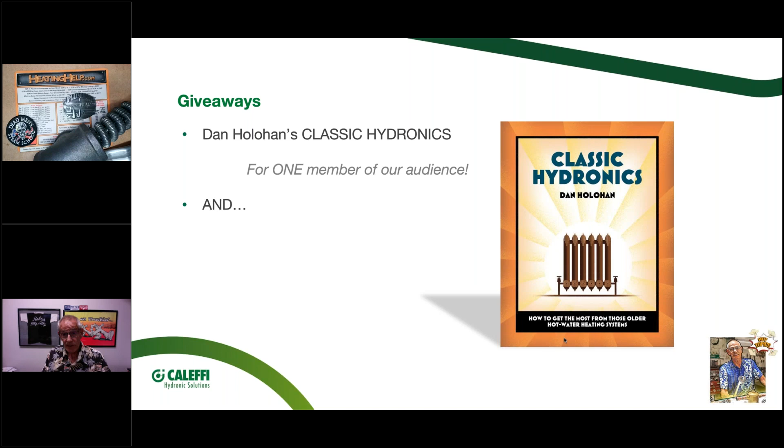All right, so heat exchangers. Those of you who've been in the business, whatever part of the business you're in, installing or selling or manufacturing, there's a lot of different types of heat exchangers out there. I mean, just look around you. If you're in your car, if you're in your home, there's heat exchangers all around of all different types. I'm going to try and just focus on ones that relate to the hydronic industry. We won't get into air coils or anything like that. And there's plenty to talk about there. Manufactured ones as well as homemade ones.

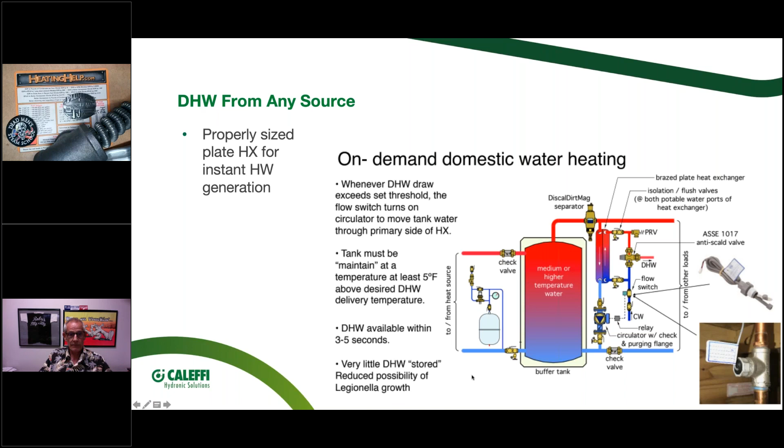And these will kick on quickly. The ones that I built at my own place, within 5 seconds of opening a faucet, of course depending on the piping length, the hot water was coming out of these. Just super performance, very high efficiency out of these flat plate heat exchangers because of the surface area. You see, it's just got a lot of place in there to do that exchange. So those are some of the pros on the side of the flat plate heat exchanger.

And these are called satellite units. We make them for heating. We make them for domestic water. We've got combination modules that do both domestic hot water and heating. Some of them will have BTU meters on them so that you can bill the tenant based on the amount of hot water, the amount of heat that they actually use. In fact, we've got one that has the ability to meter the cold water that goes into the building, meters the hot water because that's coming off the district system, and it also meters the heating water.

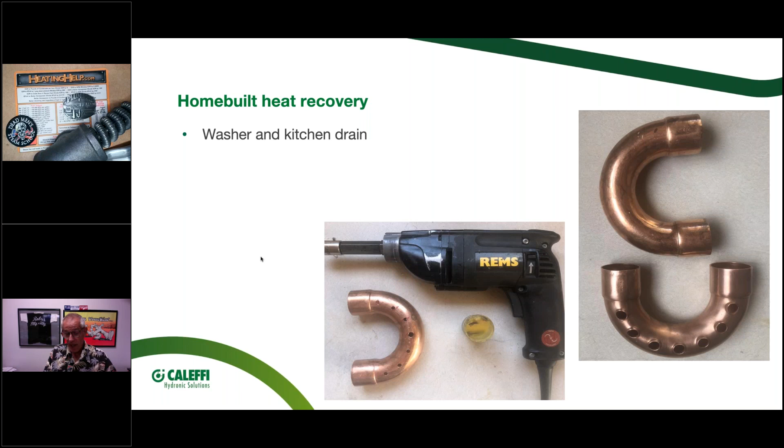And this 1.25" fits exactly just perfectly around a piece of 2.5" copper pipe. So I had a good snug connection there, and then you'll see as we go here, I found a way to put the tubes against the side of the copper tube. So I've got it installed. I've got a little bit more work to do. I'm going to put some clamps on this to get those nice and tight against the copper tube. And then I'm going to put a BTU meter on here, and I'm going to run this and see.

So I've got my wash machine drain going in here and my kitchen drain. I couldn't get to a shower drain, but I'm thinking, well, I'll just try those. And by the way, 2.5" copper matches up pretty closely to a 2" ABS or PVC as far as the OD, so it clamps in there nice and tight. So I'll report back when I get a little bit of data on my little homemade heat exchanger. It's about 6 feet tall there. I had the pipe here, so it didn't cost me a lot to put this together. A little bit of welding gas to braze those in there and stuff like that. So I'll let you know how it goes.

So a couple things before I get in this heat meter that I want to talk about: when it comes to selecting what type of heat exchangers, there's pros and cons of the different types. In fact, let me go back a few slides. I wanted to touch on this a little bit more. I have my little cheat sheet here, and I forgot to go back to, oops, sorry. On the two different types, being the tube and shell, or the shell and tube, some people call them, and the flat plate.

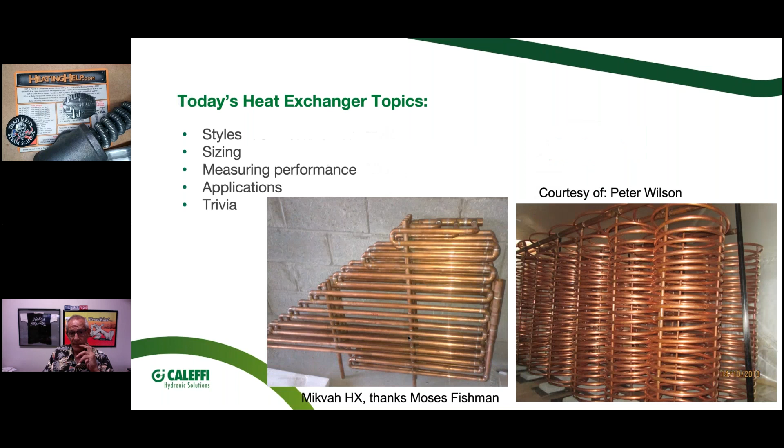Really what it comes down to, you'll find the flat plate is probably one of the most efficient, just because there's a lot of surface area. And they've really engineered these over the years. They've gotten to the point where they can actually change the size and the shape of the little chevron. If you've ever cut one of these open, you've seen these plates, they can change the size and the shape of that to really optimize the performance, the thickness of the plates in there, the number of plates. So that, of all the ones that I've looked at, claims to be the most efficient.

Now, the downside to that is it's really just good for clean liquids. You wouldn't want to put fibrous material, like the paper and pulp industry uses heat exchangers. That wouldn't work so good through that. You wouldn't want to put paint or heavy oils or something like that. So they're best for clean water. Some brackish water can go through there. Sometimes you'll see salt water going through them, but they don't work well when you have a high viscosity fluid or something that's got chunks in it. Waste sewage water, for example, can be used for heat exchange too, and that wouldn't work so well for a plate heat exchanger.

One of the questions that came in: can you oversize a plate type of heat exchanger? And I didn't know the answer, so I went and I found some good information on Alfa Laval's site today. And they said, in fact, you can't, because the key to a flat plate heat exchanger is you want turbulent conditions in there, because when you have turbulent conditions, that's where you're going to get the best contact with all those shapes in there. That's where you're going to have the best heat exchange.

And the key to a plate type of heat exchanger is you've got two moving flows. You've got a pump flow. You can't just gravity feed through a flat plate heat exchanger. So you've got a pump flow on both sides, so you've got good turbulent conditions on both sides of the plates in there. So the key to that is having them pumped and sized properly. And if you oversize it, what they say can happen is you can foul up those plates. So let's think of a domestic water application where you've got really hard water.

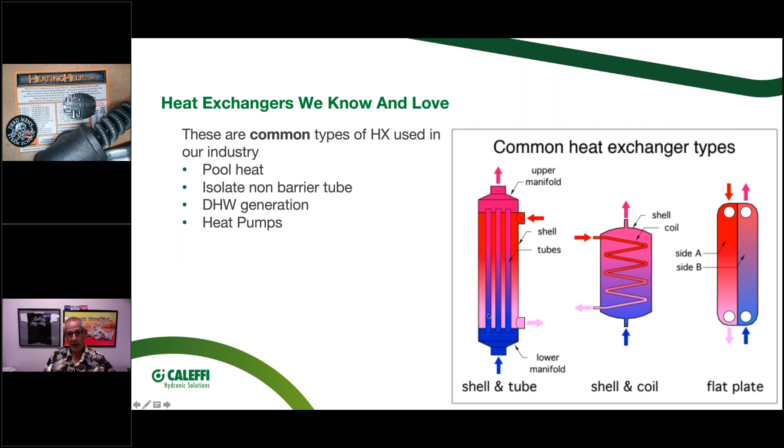If you oversize it and say, well, the price was right, I got 3 times the size that I needed based on the software program, but in fact, you could be going the wrong direction. So just be aware of that. There are some areas that you could get in a little bit of performance. So if you are going to start going with paints or heavy fluids or something like that, this type of heat exchanger is going to be better. They both were developed, from the research I did today, in the early 1900s. I think the power plant industry is where those came from. So that was one of the questions that came in about oversizing.

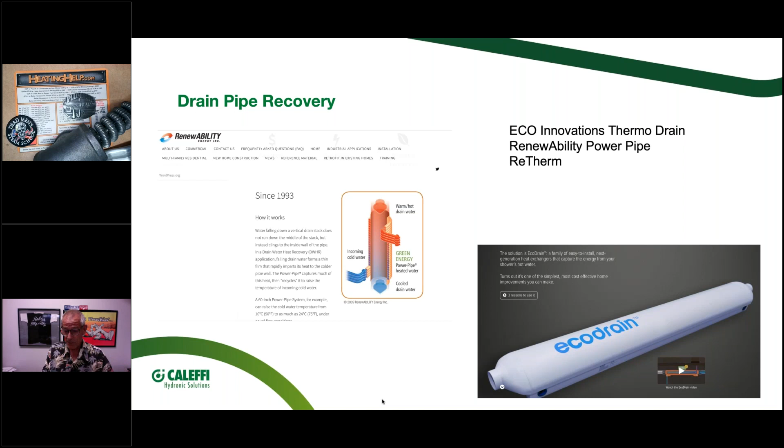Yeah, so what it's going to come down to is you start going with higher flow rates, it's going to cost you more pumping power. So that has to come in. Now, certainly for these little residential applications, that's probably not going to be a deal breaker. You're not going to get out of the typical little wet rotor size pump. But if you're doing a large application, I'll show you one that I visited here a while ago, that can make a huge difference if you're starting to run 20, 30 horsepower pumps to run all this. You want to pay attention to that.

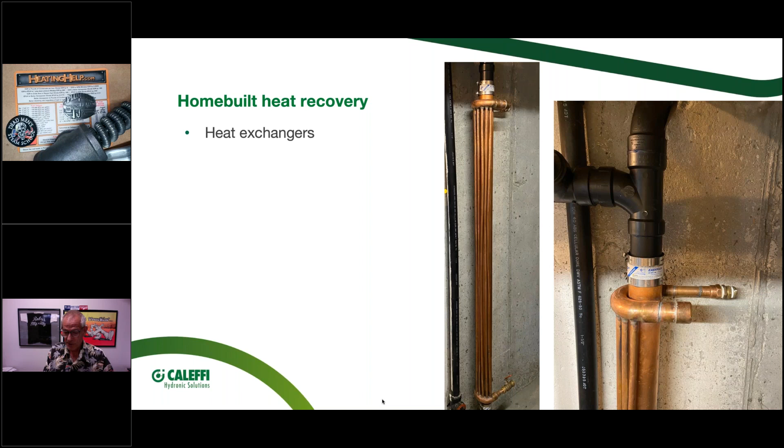If I know the flow rate going through there, and I've got 2 temperature sensors measuring my delta T across it, really that's the information I need to come up with a BTU performance or output on that. So that's really the best way to know exactly what's happening.

So we offer that BTU meter if you've got an application for that. We're starting to see more and more people doing district systems again. There's some projects up in Canada right now that are doing district systems. That's a good place for a BTU meter if you want to start billing your customers, your clients, your tenants, whatever, for the actual energy they use. And as we start to get in these net zero homes and stuff like that, we're seeing BTU meters are having a part to play in that here.

I'm going to let Max talk a little bit about this. So this is a system in DC.

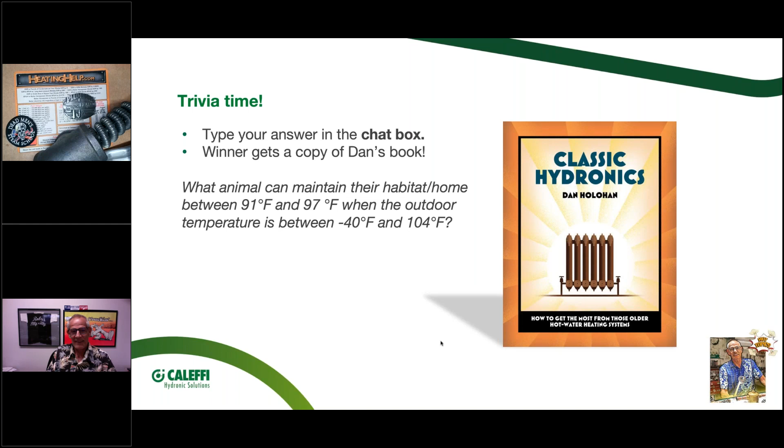So bear, chicken, honeybees, frog, mouse, beaver, brown bear, bee, woodchuck, and human. So what's the correct answer? It's the bees. So Colin Wonder was answer number 3, and it was correct for honeybees. Attaboy, Colin. Maybe he's a beekeeper.

But so this is another first for me. This summer, Max and I decided to get some livestock, and with the size property we have, we couldn't put a lot of big livestock on. So I don't know if bees are really considered to be livestock, but we bought some bees. Somebody gave us these boxes, and we went and bought a colony of bees, and that's my beehive in the backyard there. And you can see when it gets really hot at the end of the day, I even put a shade over it for them.

They beard up is what they call this, where they get out there and they actually flap their wings, and they're trying to maintain the temperature inside that box by just flapping their wings. And they can sense that kind of temperature gradient and keep it exactly where it needs to be. So that was a pretty amazing heat exchange feat, I would say, when it's over 110 degrees here in a couple of days, that they're maintaining that hive temperature. And certainly this winter, when it gets down below 0 here, same thing.

The honey that they've stored over the winter time is their fuel source. You got to have a fuel source to be able to do that heat exchange, just like the human body. I mean, we eat food, and as a result of that, we have energy, and we also give off 400 BTUs at rest, just from the food that we consume.

Yeah, we'll get that copy sent out to you. Thanks, Colin, for playing and for always participating. So what else do we have? I'm going to go through a few more questions here.

On that instantaneous one? Yeah, so I used a 5x12 20 plate, and here's what I was doing. I had it on my solar tank, and my solar tank in the winter months would only get up to 120 degrees. So what I did is I went to, and actually Siggy helped me size it, what's called a close approach method. And what a close approach means is I want my B side, my domestic water coming out of that, to be pretty close to 120 degrees. I don't want to get much colder than that for my domestic hot water.

So when you use a close approach sizing method, what you're going to find is the heat exchangers start to get pretty large. In fact, maybe that was a 30 plate. I had two different ones. One was up at the house and one was at the shop. I think the one on the shop in that solar tank was actually a 5x12 30 plate. So that's the key, is you got to know what kind of temperature you have going into it.

And of course, it was just the two of us. I didn't need a lot of domestic hot water. A gallon and a half was plenty for us to take a shower and one other, maybe the dishwasher running simultaneously with the shower. So yeah, it was just a flow switch and a little heat exchanger that I bought, and I think I had a little Grundfos Alpha on the pump. I used to have a picture of that. I don't think I can get to it quickly, but it worked fine.

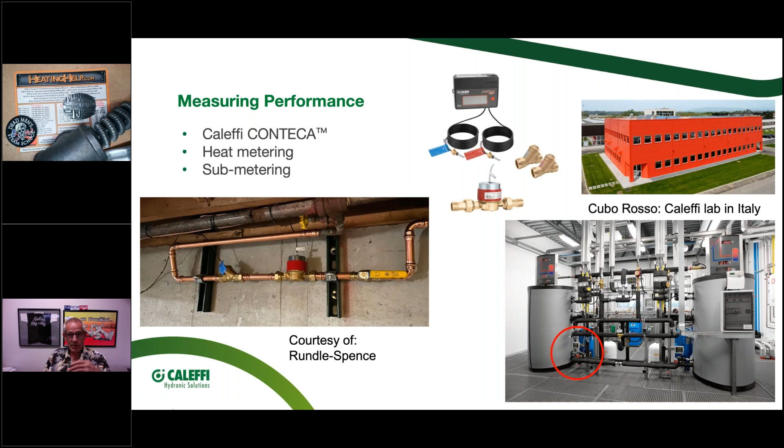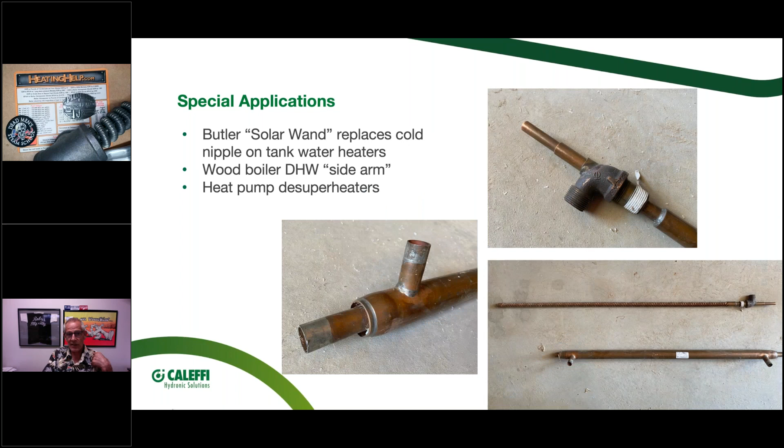What I noticed is that if you start looking at the ModCon boilers that are the combi versions, those little modules that I showed you a couple slides earlier, those are actually pretty small heat exchangers. I was surprised when I took one of those apart for the first time. They must be metric size because I measured it to be like a 3x8 size. I'm thinking, gosh, how do they get so much performance out of such a small one? Sorry about that. In a ModCon boiler that I've seen, they have a 3x8. But the key there is they take the boiler temperature up. Some of them will go up to 180, 190.

So if you've got 190 going in and you're just trying to get the water to maybe 105, 110, just enough to be warm when you're in the shower or the tub, now you've got a pretty big delta T to work with, and I've got the full output of the boiler. So I'm going to switch off the heating load, usually with one of these diverting valves. So all the output of the boiler goes to the heat exchanger, as well as the highest temperature that boiler can comfortably run at. Some of the ModCons maybe are set at 180, but I've seen them creep up to 185, 190 just before they shut off in domestic hot water mode on the combi.

So for sizing, I would say you don't want to oversize, because you don't want to foul that heat exchanger. All the places that I've lived over my lifetime, we've had hard water. And if you take a water heater apart that's been in for 10, 15 years and dump it out, there's a lot of scale and minerals in there. When you have a hot surface area, like running the A side of that heat exchanger with 190-degree water, the minerals really precipitate out, attracted to that high surface temperature on the plate, and that's where you see the fouling.

Now, that being said, I was recently at a shop up in Montana, and they had one of these modules from inside a combi boiler on the workbench. They said they were having problems with it not giving the hot water expected, about 6 months into the installation. So they called the manufacturer, who said check the sensors and make sure of the shuttle valve, and they checked all the things, nothing was working. They changed things, it still wasn't working. So finally, the contractor took the whole thing apart. He took these little Allen screws out and took it apart.

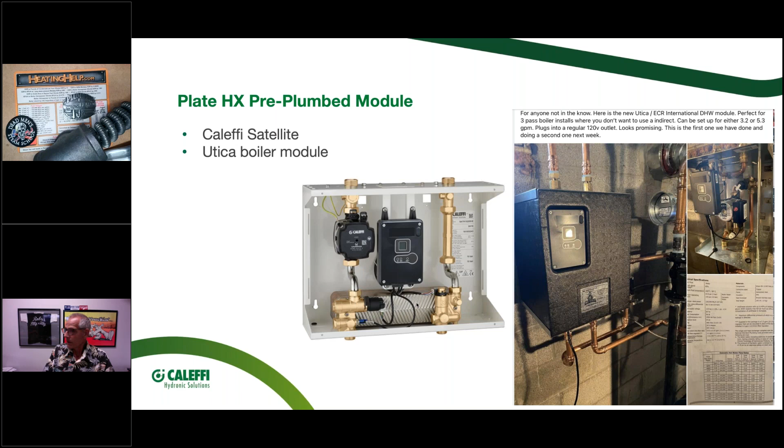All right. Let me show you this over here, a couple things. I had another idea for a homemade heat exchanger. So if you have a tank with a 2-inch connection, that's just a 2-inch T there. What I did here is I took some CSST gas flex type of tubing. This happened to be the solar tubing that we had. This was a 1/2 inch. And what I did is I annealed it. And what you do when you anneal stainless tube is you just heat it up. You don't have to get it red hot, just heat it up a little bit, and it softens it so you can bend it really tight.

So I made this heat exchanger that I could put inside of a 2-inch tank, and then I took a double tap. Let me see if I get the picture here. A double tap bushing here that I can bring the 2 connections out and connect to them out here with a little O-ring seal in the ridges to do that. So not very big. Again, I was trying to get somewhere between that Butler solar wand and having to buy a bigger flat plate or a tube and shell heat exchanger.

So if you're playing around with things, that's one thing that you could do, is just take some stainless steel tubing, heat it up. You can see how I discolored it when I heated it. It was shiny stainless, but that's how you can soften it to make it so you can get a really tight bend at the end without kinking it there.

Then over here, heatinghelp.com. It's an old, I was thinking about offering some of those again. Sorry about the dirt. These are all different ModCon boiler cutaway sections that I got over the years. I think that's a Viessmann. I think this is one of the Dunkirk or Utica. You can see what they're trying to do with all these is they're trying to get a lot of surface area. They kind of crimp them and they put some shape to it, again, that they're trying to get good transfer in there. The same thing here with the dimple thing, so they can keep a space there for the flame to go through, but it's all about the surface area.

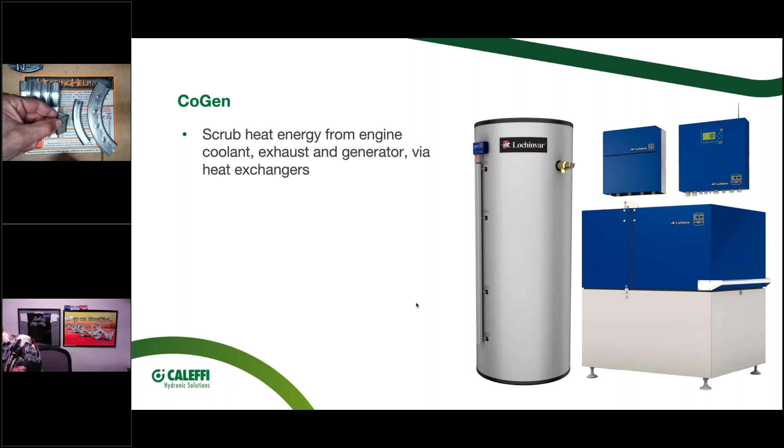So those are a couple examples, but what you'll find, and one of these I had was a used one, as these start scaling up on the inside from bad boiler water, a lot of minerals or high TDS water in them, you'll start scaling up that surface inside there, and then you don't have a good heat exchange. And that's when you see a ModCon boiler where the metal starts to discolor. It's because heat exchange has been hampered, you can kind of see a little bit of it in there, by the buildup of the minerals in there. And that's, again, the time to put a cleaner through it.

We're also going to lobby Aaron to come out with another belt buckle. Some of you have the Heating Help belt buckles. I'm thinking now with the 3D printers, you could probably squirt one of these out of some exotic material like ceramic or titanium or something like that to keep the weight down on your belt, right?

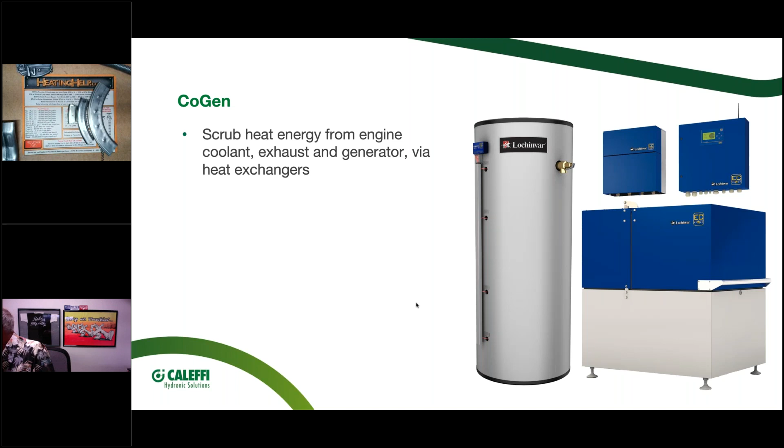All right, so another one about cleaning out a heat exchanger if it was subjected to the rubber tube. Have you ever run across that? Yeah, all the chemical people seem to have pretty good boiler cleaners these days. I like Rhomar just because I know that company. I've worked with them, Fernox, Sentinel, Hercules. Usually if it's a boiler side, most of those boiler cleaners are just a really strong detergent. They're a soap at the end of the day, and they do a pretty good job of that type of debris.

Now, if you have one that has a lot of white mineral scale buildup, I tend to like the acid type of cleaners like Hercules Sizzle. It's actually a drain cleaner, but it's an acid that can be used in domestic water. It says right on the bottle, safe for domestic water. So if it's a white lime scale buildup from just hard water, sometimes the acid-based cleaners will work a little bit better than the soap-based cleaners. So yeah, squirt a little bit. They make it in aerosol cans now that you can squirt directly in your boiler, run it for a couple days, flush it out. Save the water that you flush out, and you'll see what's coming out of it.

You've got a good job cleaning it out. Some of those cast iron boilers, what happens in a boiler that's a big wide open chamber like that, there's not a lot of flow velocity going through that boiler. And what happens is that stuff settles out to the bottom of the section. And sometimes it's hard to blast that out without getting in there with some kind of rod or something to actually get some good flow velocity down there and actually move it out.

And that's usually when you hear a cast iron boiler start percolating, that popping, banging noise, it means you've got a lot of sediment in those sections, and it's not always easy to get out of there. So cleaner through it, power flush if you can with a little half-horse transfer pump so you get some pretty good flow velocity, and that should do it.

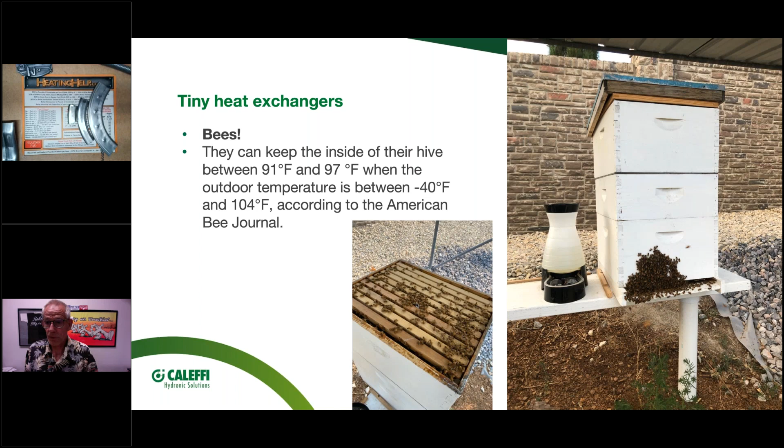I think one more, asking about a dirt separator with the magnet on the boiler return for anything that's going through a heat exchanger. What's the recommendation there? Yeah, the reason the magnetic thing is so important these days is as we start seeing more and more ECM pumps, and I think we're getting close to the day when the PSC type of motor circulators, wet rotor circulators, are probably going to disappear. I see Taco just came out with an energy standard on some of their ECM pumps.

Really, the magnetic function to me is just to assure that there's nothing going to get inside those ECM permanent magnet motors. We've taken dozens of different ones apart over the years, of all different brands, and some of that magnetite, again, we're talking magnetite down to 0.5 micron. That's thinner than a hair on your head. That can get through the seals on the pumps. That can certainly get through the wet rotor can. So to me, the magnetic separator is mainly to protect those ECM permanent magnet pumps.

But on any job that we put one in, stuff comes out, stuff that's been swimming around in there, stuff that's reducing the heat exchange if it's settling into your radiators and your boilers and your tube, the ModCon that I just showed you here. The magnetic separator just takes it one step further than just a Y strainer or a dirt separator by pulling the little particles out that you won't get out with a strainer or a dirt separator. They're just too fine.

It's the boiler ink. If you see black water coming out of a boiler, we call that boiler ink. And really, it's got metal. It's almost like it's got Etch-a-Sketch particles inside of it that make that water black. If you put a magnetic device on that and you run it for a day, you'll see that black inky water is all of a sudden clear water because you pulled all those little particles out with your magnet.